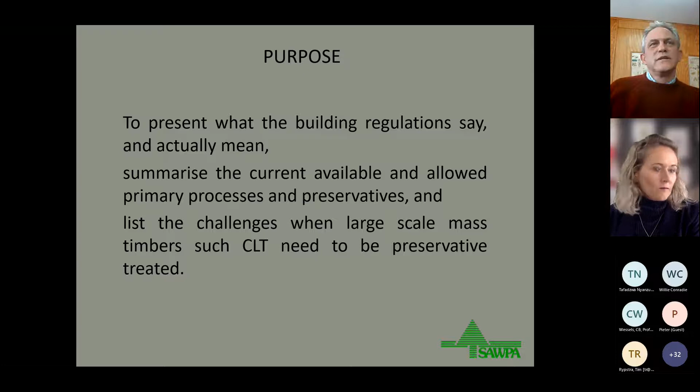You'll see what I mean later on by that. To summarize the current available and allowed processes and preservatives that are used in South Africa, and then also to list the challenges when large-scale mass timber products such as CLT need to be preservative treated, which I think many of you already understand and know of.

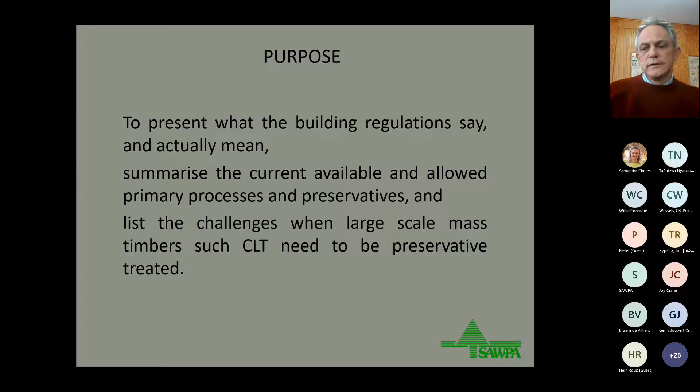So when we look at the building regulations, and specifically regulation A13, which deals with materials, A13(1)(b) says all timber used in the erection of a building shall be treated against termite and wood borer attack and fungal decay. And this must be done in accordance with SANS 10005, which is quite important. And then it must also bear a SANAS accredited certification body's mark.

Now, when we look at the term all timber, it can be very misleading. And we've actually found some problems on this in the past from engineers and architects saying they want to treat certain timbers, but they can't treat it or nobody wants to treat it. So this term can be misleading. It is misinterpreted, as not all timbers are treatable, nor is it necessary to treat. And I can just mention that we are in the process of trying to amend either the regulation or the application of the regulation to give more detail on this.

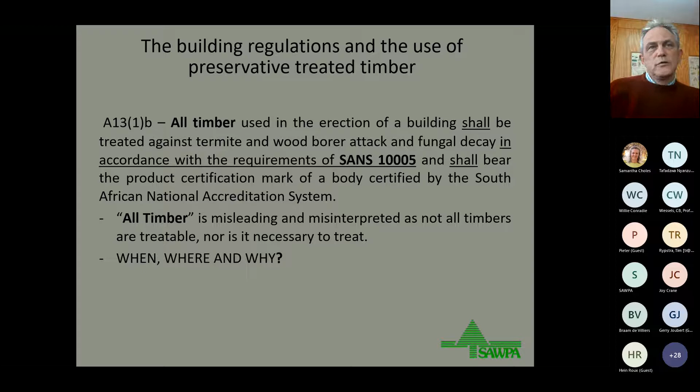Then we get to the when, where, and why. When do we treat, where do we treat, and why do we treat? When we look at that, we'll see that it's mainly the threat of degradation to wood when used in certain areas or conditions that will determine if treatment is required or not. The second point is the characteristic of the wood. Does it have a natural durability or not? And is it treatable? That will also dictate whether treatment is possible or not.

So back to A13(1)(b), and it refers to SANS 10005, which is something that you have to read together with the regulation. It specifies, amongst other things, the approved preservatives and the processes to be used. And more importantly, in clause 12, in direct relation to A13(1)(b), it talks to the use of treated timber in specific demarcated areas in South Africa.

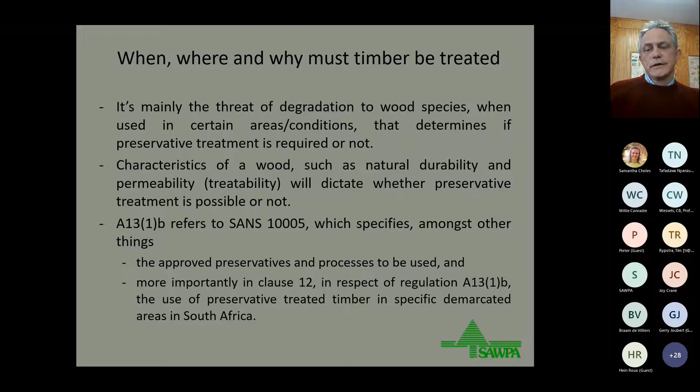When we look at clause 12, it says to qualify as being adequate for its purpose, structural timber of the two main species used in a permanent building in the areas given in 12.2 and 12.3 shall be treated in accordance with 12.4. Now, 12.2 speaks to softwood species, which is your pines, spruces, firs, etc. And here it says that sawn timber, planed and profiled, poles or logs, round or partly round, of softwood species shall be treated in accordance with 12.4 when used in the following municipal areas or towns in South Africa. And then it lists the names, which I'm not going to show now. It also refers to Annex D.

There's another requirement in there that's got more to do with the use of load-bearing timber or bearers in decking in the inland areas. That requirement was brought in later on because we found that a lot of decks were built in the inland areas not using treated timber as the bearers, and then you get a moisture trap and you find rot between the actual treated decking planks and the poles, which was not something that we wanted. So that was brought in, just as a point of interest.

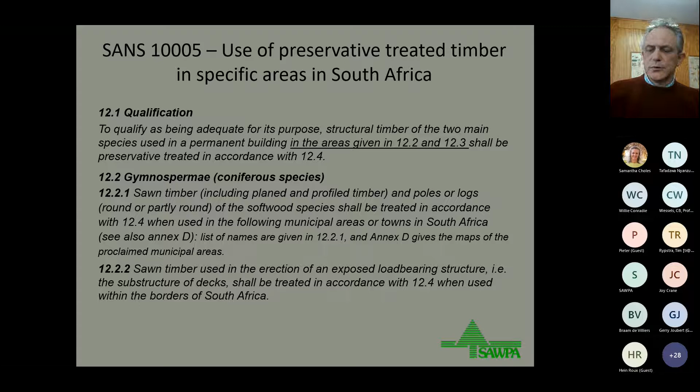These are the maps which are included in SANS 10005. There are actually 4 maps: the Northern Cape, the Western Cape, the Eastern Cape, and KZN. These maps are also found in SANS 10400 Part L, I think, and will also be in the revised SANS 10082 on timber frame buildings. It might even be in some other documents as well that I can't think of at this moment.

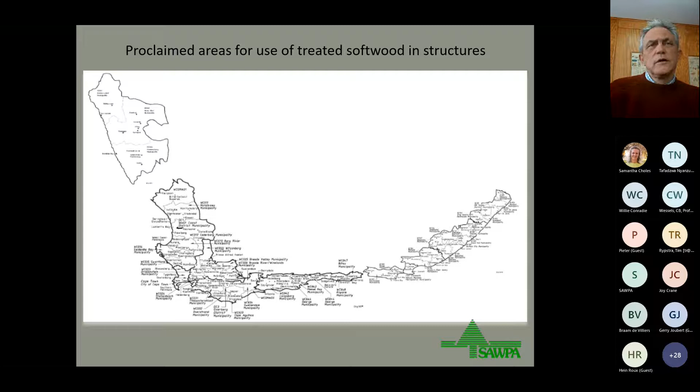So when we look at the softwood species and the coastal regions, which you've now seen, what are the main concerns? Why is the treatment so important there? The first one, as you can see on the photo, is Hylotrupes bajulus. It's also known as the European house borer. You can see the adult beetle, it's quite big. They range between 16 to about 23 millimeters, female to male, and the grubs are quite large. So they can do some extensive damage when there's a couple of them inside a piece of wood. These insects are borer beetles and attack most softwood species, that is your pines, your spruces, and your firs. They are mostly active between Port Elizabeth and Cape Town.

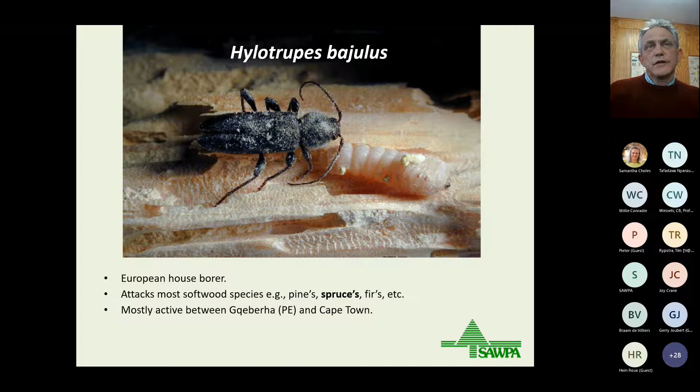So you also find in the areas where they're active that door frames, doors, flooring, etc. also gets attacked. Unlike subterraneans, they infest and colonize the wood under attack. So they don't live in the ground, they live in the wood. They fly in, they infest, and they destroy and then move on.

They are active in the warmer parts of the coastal areas between PE up to Richards Bay, but very predominant and mostly found in the Durban and surrounding areas.

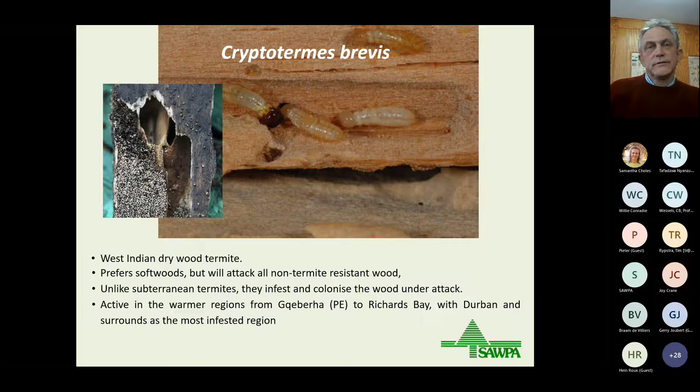Then we go to 12.3, the broadleaf, the hardwood species. SANS 10005 says that all sawn timber, planed timber, poles or logs of the hardwood species shall be treated when used within the borders of South Africa. And then it also lists products that you can exclude if insufficient sapwood is available to obtain the retention as required. Those products listed there will be mostly sawn machine products where, after it's cut from the main part of the tree or log, it is timber that contains heartwood and not sapwood.

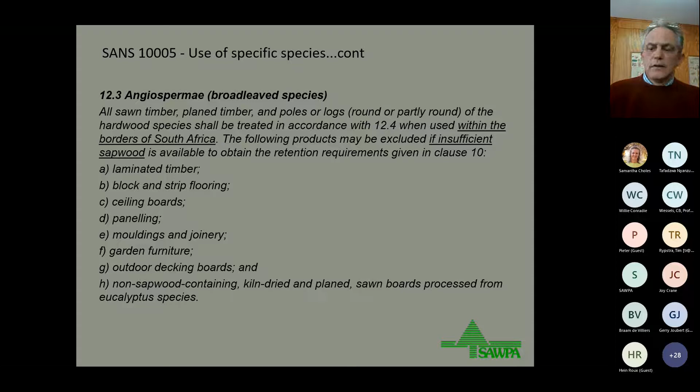And you will also see then when we look at the next photo, this is the main culprit that attacks hardwoods, Lyctus brunneus. As you can see from the little photo on the left hand side on the bottom, it's not a big beetle. They're similar to maize beetles, very small. Their grubs are small, but when there's quite a lot of them, they can, over time, also cause a lot of damage. They are called powder post beetles, as a common name.

They attack only the sapwood of hardwood species, and that's why we will exclude certain products, because if there's no sapwood, there is no threat from Lyctus. They only eat sapwood, which is high in starch and sugars. It has a very wide distribution and is found over most of Africa.

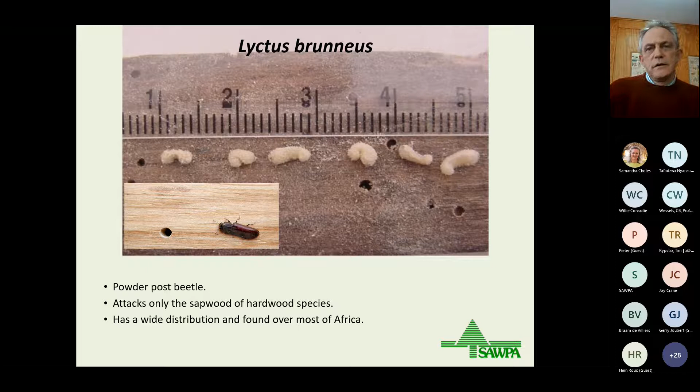There's another one that's called Lyctus africana, I think, if I'm correct. Very similar, does the same thing. These Lyctus borers are actually found in many parts of the world.

Then we go to SANS 10005 and the processes and the preservatives that are specified. 10005 only specifies the primary impregnation processes and wood preservatives. So these are industrial processes whereby the wood preservatives that are registered and approved for that purpose are impregnated in some way or another into the wood.

And the first process that's mainly used in South Africa is the high pressure process. There we have two, the full cell process. From the name, it tells you that once the treatment is done, the cell cavity of the wood is filled with chemical. That's where the term full cell comes from.

Class W preservatives, which are waterborne preservatives, such as CCA, copper azole, ACQs, are treated pine or used to treat pine and eucalyptus sawn, as well as round timber poles. The full cell process is also used for class C, which are coal tar preservatives, creosote, to treat eucalyptus poles.

The full cell process and those preservatives are then used to treat from hazard class H2 to H5. H6, as you know, is a dual treatment of both class W preservative, CCA, and creosote. Then another high pressure process that is used in South Africa is the empty cell process. This process is only used for the treatment of pine poles using coal tar-based creosote preservative, H3 to H5. We don't list H2, although the standard will have it. We don't mention it because you will not use creosote normally in an H2 environment because of the strong aromatic smell.

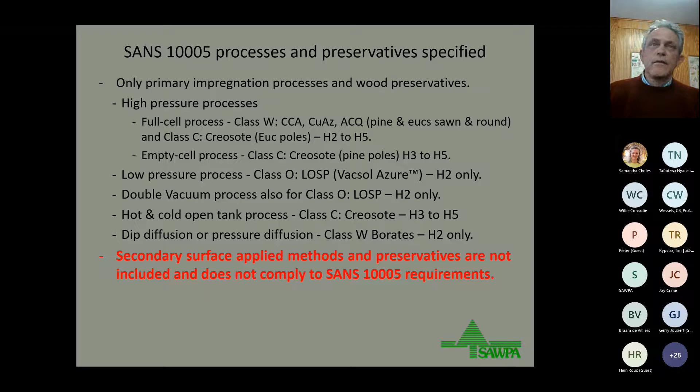And when we go to the challenges that we have when treating a product such as CLT, the treatment of CLT with conventional methods is widely regarded as problematic. And when I say widely, it's internationally. I've just been to the IRG meeting in Slovenia, and this discussion has come up a lot of times. To treat large-scale dimension timber with conventional methods, it's impractical, it's not viable, it's very costly. And probably one of the reasons why most CLT in the world is not treated.

CLT structures are project specific, meaning they are prefabricated panels. They vary in size and shape, which makes it very difficult to plan ahead or have a lot of them in the same size that will fit into a treatment plant. Every project is different, and the CLT panel dimensions are often such that they don't fit in conventional treatment vessels.

In the pre-assembly stage, before you make the CLT, the treatment of those boards can be done using conventional methods. Yes, it's possible, but these have their own specific drawbacks, which we'll touch on now. When you use Class W preservatives, waterborne preservatives, it requires redrying after the treatment.

That then leads to uneven surfaces on the boards, which requires machining and planing, and that causes the production of contaminated waste. CCA waste requires specialized and costly disposal. It cannot be burned, and it may not be used for animal bedding or mulch. So that's one of the big problems in using CCA as a pre-treatment.

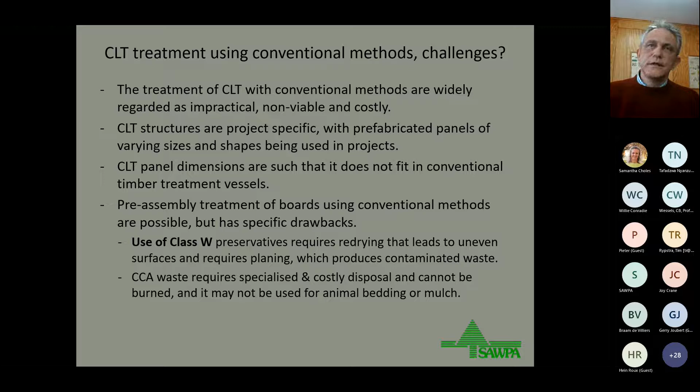Class O preservative is your organic solvent preservative. They do not require redrying, and the timber remains dimensionally stable, so there are no uneven surfaces. But it's a solvent carrier, and it can affect the glueability.

The minimum retention required by the standard is easily achieved when using the double vacuum process only. Mainly with softwoods, they penetrate easily and absorb quickly, and this often results in the preservative penetration and distribution being limited, meaning it's not very deep and not distributed over the full treatable area.

Planing to prepare the surface for glueability will then remove a preservative layer, and in some cases this exposes untreated inner areas of the boards. We have actually experienced that in South Africa, with people using this process and CLT treated this way.

A deeper penetration and distribution can be achieved by obtaining higher retentions, but this comes at a high cost. The more chemical you put in, the higher the cost, and solvent-based chemicals are not cheap.

Then the question is asked: is it necessary to achieve full cross-sectional penetration on timber, regardless of what preservative is used? If a CLT panel is used in a protected and dry interior environment, where by proper design you ensure very low moisture exposure, then it's highly likely you don't even have to treat it. But you have to ensure the design is such.

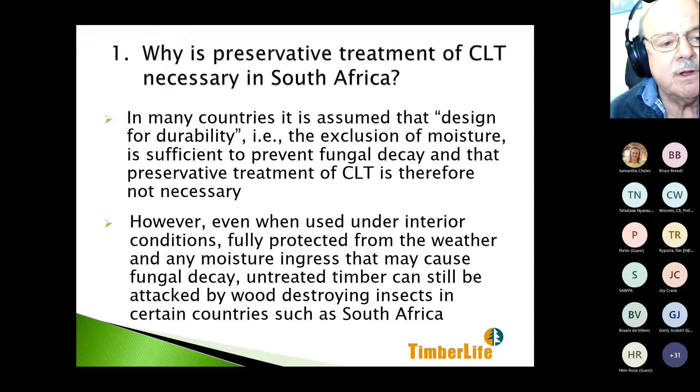Firstly, why is preservative treatment of CLT necessary in South Africa? In many countries, as Bruce has mentioned, it is assumed that design for durability - meaning the exclusion of moisture - is sufficient to prevent fungal decay, and that preservative treatment of CLT is therefore not necessary. However, even when used under interior conditions, fully protected from the weather and any moisture ingress that may cause fungal decay, untreated timber can still be attacked by wood-destroying insects in certain countries, such as South Africa.

In the coastal regions of South Africa, softwoods are attacked by the European house borer. In the more subtropical regions along the coast, timber can be attacked by the drywood termite. And throughout South Africa, the sapwood of eucalyptus timbers can be attacked by the powder post beetle.

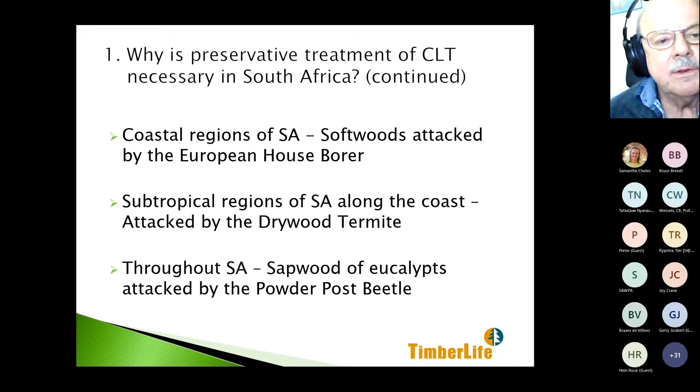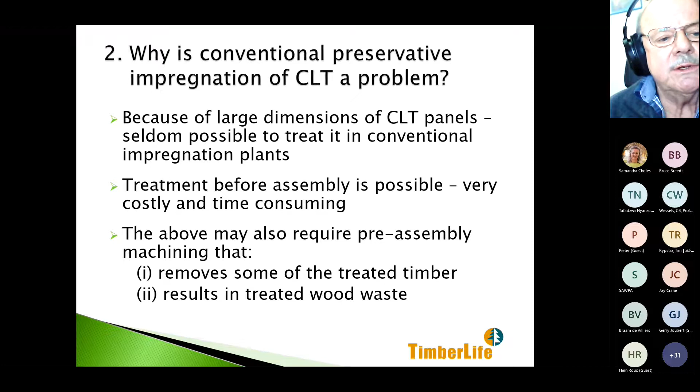Firstly, because of the large dimensions of CLT panels, it is seldom possible to treat it in conventional impregnation plants. Treatment before assembly is possible, however, it's very costly and time-consuming, and it also results in certain cases requiring pre-assembly machining that removes some of the treated timber and obviously results in treated wood waste that needs to be disposed of.

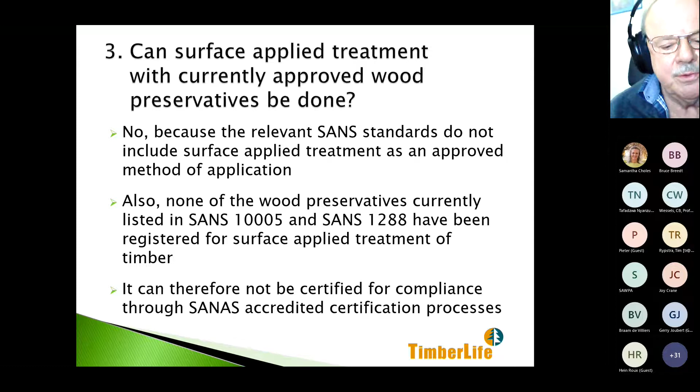An interesting question is, can surface applied treatment with currently approved wood preservatives be done? The answer is no, because the relevant SANS standards do not include surface applied treatment as an approved method of application. Also, none of the wood preservatives currently listed in SANS 10005 and SANS 1288 have been registered for surface applied treatment of timber. It can therefore not be certified for compliance through SANAS accredited certification processes.

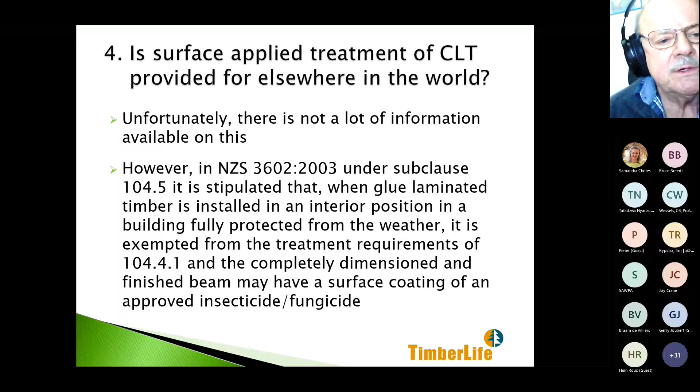Is surface applied treatment of CLT provided for elsewhere in the world? Unfortunately, there's not a lot of information on this. However, in the New Zealand specification, NZS 3602 of 2003, under subclause 104.5, it is stipulated that when laminated timber is installed in an interior position, in a building fully protected from the weather, it is exempted from the treatment requirements of 104.4.1, and the completely dimensioned and finished beam may have a surface coating of an approved insecticide fungicide.

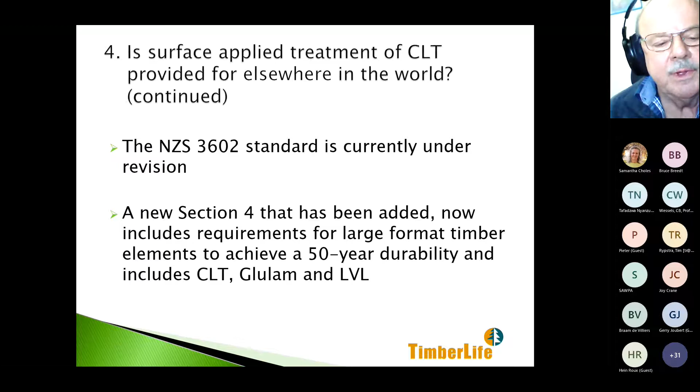The NZS 3602 standard is currently under revision. A new section 4 has been added, and this now includes requirements for large format timber elements to achieve a 50-year durability, and includes CLT, glulam, and LVL. It further specifies that, when a glulam or CLT member is installed in an interior wall or floor within a building and not in a wet area and fully protected from the weather, the completely dimensioned and finished member shall have a supplementary surface treatment applied to all surfaces. The surface treatment shall be a boron in glycol formulation, which contains at least 20% boric acid equivalent, and shall be factory applied by brush or roller as 2 coats to all surfaces.

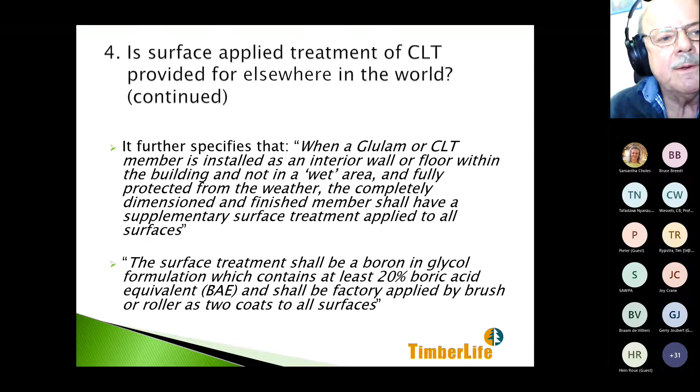How can surface applied treatment of CLT be certified for acceptance and compliance in South Africa? One possible route that we have discussed is to enable compliance certification of suitable surface applied preservative treatments by registered pest control operators. The following conditions, however, will need to be carefully considered. Only for specific and specified mass timber products that are difficult to treat otherwise, such as CLT, and only allowed for low-risk interior application that is fully protected from the weather and against any ingress of moisture.

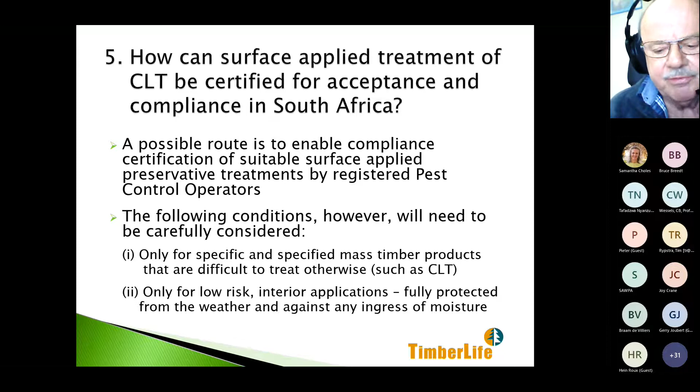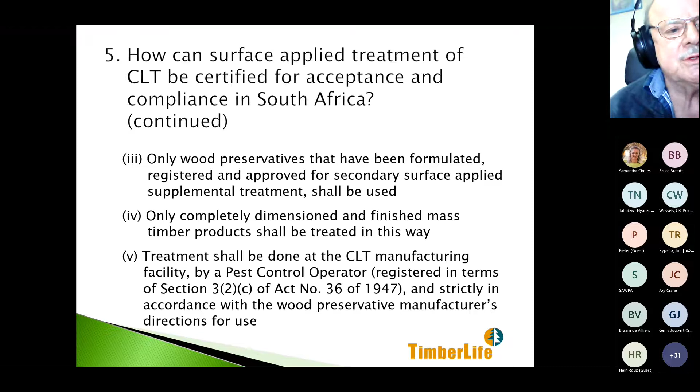Only preservatives that have been formulated, registered, and approved for secondary surface applied supplemental treatment shall be used. Only completely dimensioned and finished mass timber products shall be treated in this way. Treatment shall be done at the CLT manufacturing facility by a pest control operator registered in terms of Section 3(2)(c) of Act 36 of 1947, and strictly in accordance with the wood preservative manufacturer's directions for use. The treated timber shall be marked as surface applied treatment, for example SAT, with the pest control operator's name and registration number. On completion of treatment, the pest control operator shall issue a certificate of compliance containing all relevant information. All surfaces that are exposed during installation as a result of machining or damage shall be recoated with the same preservative solution.

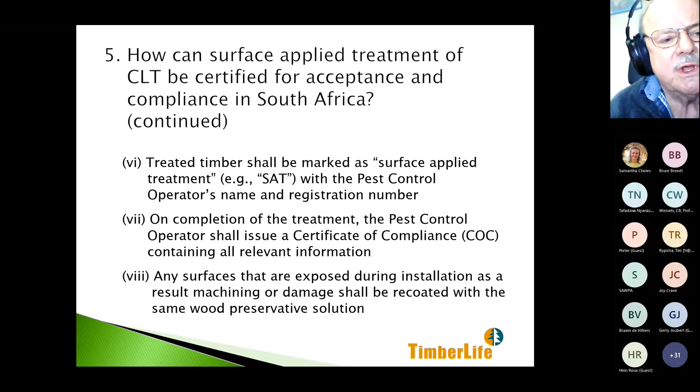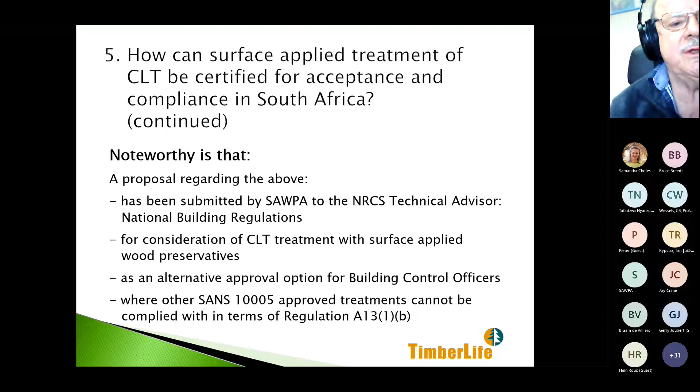Noteworthy is that a proposal regarding the above has been submitted by SAWPA to the NRCS Technical Advisor, National Building Regulations, for consideration of CLT treatment with surface applied wood preservatives as an alternative approval option for building control officers where other SANS 10005 approved treatments cannot be complied with in terms of Regulation A13(1)(b).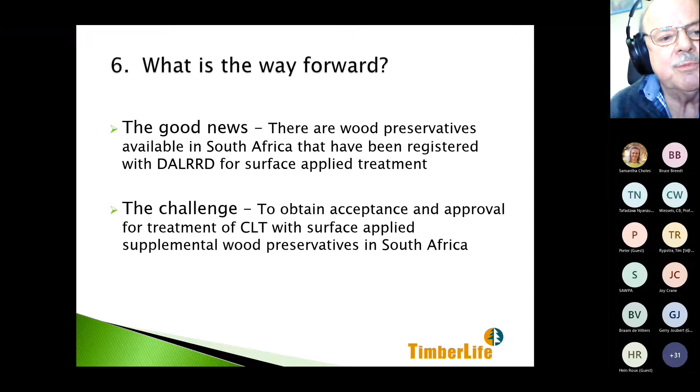And lastly, what is the way forward? The good news is there are wood preservatives available in South Africa that have been registered with DALRRD for surface applied treatment. The challenge is to obtain acceptance and approval for treatment of CLT with surface applied supplemental wood preservatives in South Africa. And that concludes my presentation. Thank you.

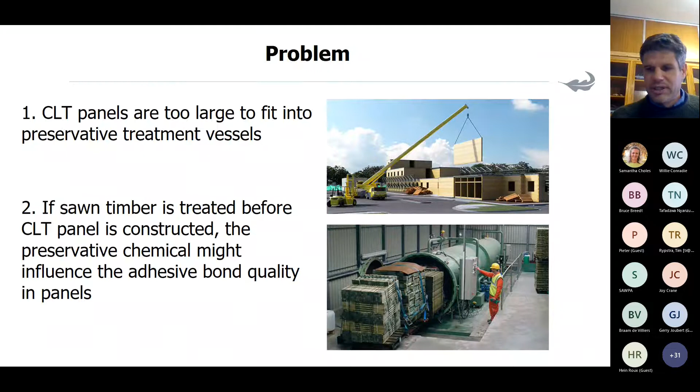So that's the traditional preservation method that's already been approved through SABS. The scope of the two projects was much larger than what you see here, but in any case, this is just a very short, focused discussion.

We worked on both SA pine, Pinus patula, and Saligna, as it's known commercially, or Eucalyptus grandis. For the patula, we tested two preservatives: the traditional one often used in South Africa, CCA, and also disodium octaborate tetrahydrate, or DOT, a boron-based preservative. As adhesive for SA pine, we used polyurethane. So those were the tests on pine.

For Saligna, we tested two preservatives, copper azole and also the boron-based one. And there we tested three adhesives: polyurethane, melamine urea formaldehyde (MUF), and phenol resorcinol formaldehyde (PRF).

After manufacturing test samples, all of them were tested for shear strength and for delamination. Those are, in all the international standards, the standard methods of testing bond quality. I must just say here that we used the standards for glued laminated timber, simply because those standards are much better developed than CLT standards at the moment.

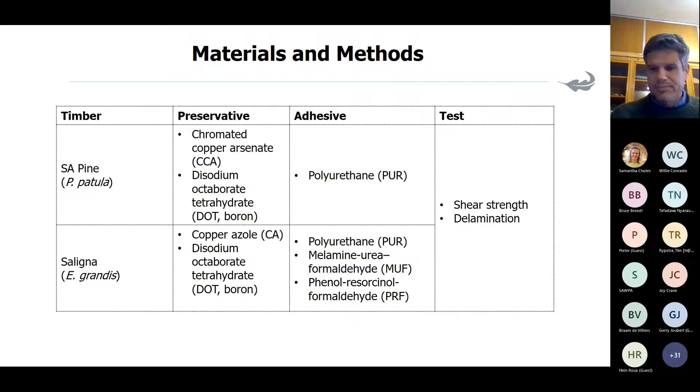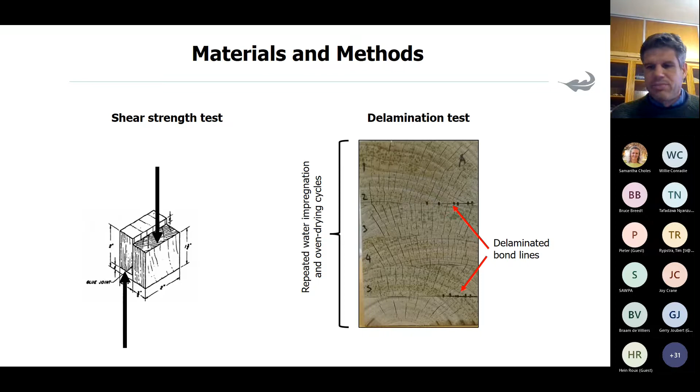These are just two pictures of the two test methods. On the left, you can see a shear strength test, self-explanatory I think, and on the right, a delamination test. The delamination test usually consists of manufacturing a block of wood, in this case 5 laminates glued together after treatment. Then you have repeated water impregnation and oven drying cycles, depending on the adhesive, 2 or 3 cycles. After the final drying cycle, you measure the length of the delaminated bond lines. So those were the tests used to evaluate bond quality after treatment.

Quickly to the results. These are the two main results for the Pinus patula, SA pine. The graph on the left shows on the y-axis wood failure percentage, and on the x-axis, shear strength. According to the EN 14080 standard, if your treatment mean falls above the solid line in the graph, then it will pass, and if it's below, then it will fail.

Above the line you see for the pine all the different treatments we had: the CCA preservative treatment, the DOT treatment, different density classes, and also heartwood and sapwood. You can see that all the different combinations passed the shear strength and wood failure requirements. So that seems to not be a problem with pine.

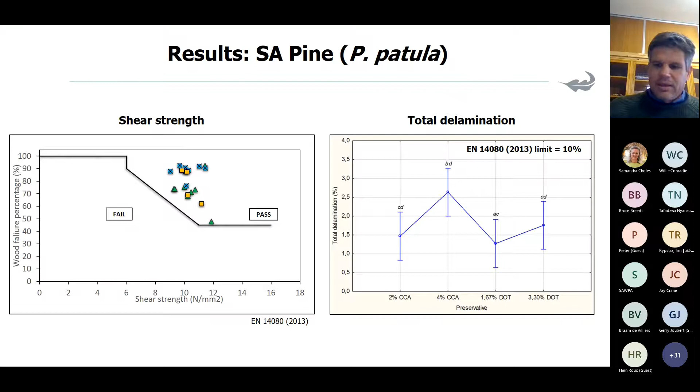Sorry for this busy graph. This is the result for Saligna or Eucalyptus grandis. It was a bit more complicated, also a different type of experimental setup, but you don't need to worry about all the numbers. At the top, in the titles, you can see we tested 17 different process runs, different variables in each process.

Those include planing, so there was surface planing after treatment or not. Then the different preservatives, the different adhesives, and we also tested different pressure when the CLT was manufactured. The last three columns were just the shear strength, wood failure, and delamination results.

The lines in green were those that were acceptable treatment processes according to the EN standard for treated CLT. Probably the biggest difference is that most of the processes that include planing of the surface after treatment gave acceptable results. Then process runs R13 and R14, which is quite interesting, had no surface treatment or planing after chemical treatment, and those two also gave acceptable results.

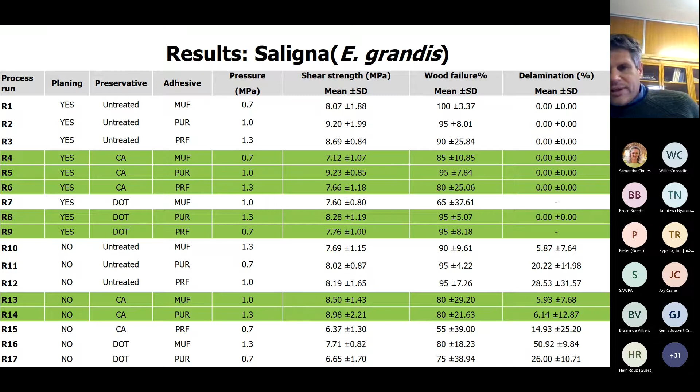Of course, these are laboratory manufactured samples, so on an industrial scale one will also have to see if it still complies. But it seems there are quite a few process routes to treat Eucalyptus grandis and get acceptable results. The interesting one for us was that even without surface treatment, some of the routes seem to hold potential.

So, very short conclusion: both Pinus patula and Eucalyptus grandis, it seems like you can treat it successfully to at least H2 level, for indoor use, before being assembled and glued into engineered wood products such as CLT.

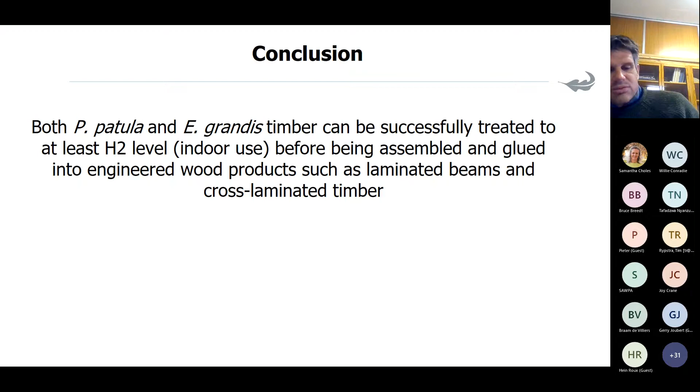There are, of course, as Willie said, it's a more expensive process. There's problems sometimes with getting rid of waste. So if you can somehow get a process where there's no planing after your chemical treatment, that would be a huge advantage. But it's certainly not as easy and low-cost a process as the surface treatment, which would of course be preferable.

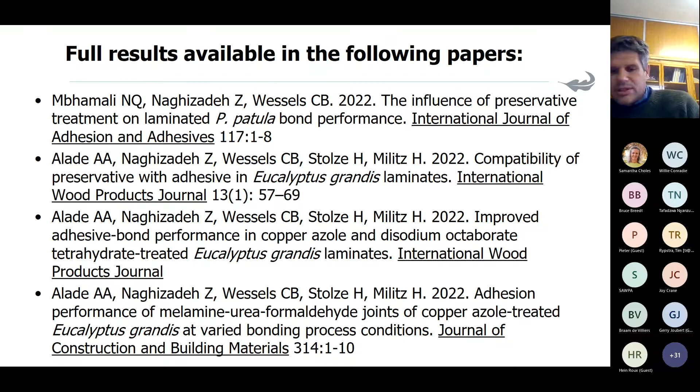I've given you just very short results. If you want to see detailed results, we tested many other things in those projects. Here are four papers published this year which give more details on the research we've done. Finally, just acknowledgement of the funders for this study. Thanks.